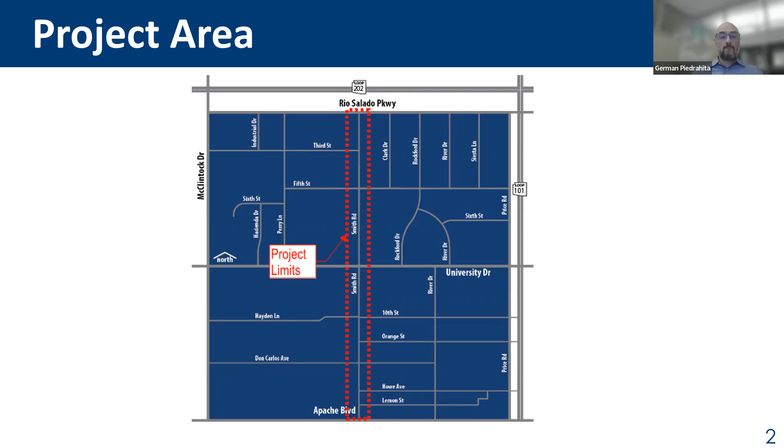Sorry. The purpose of the project is to seek input from businesses and residents and stakeholders to assist in the development of the Smith Road infrastructure improvements. Several public outreach efforts have been conducted as part of the project, and feedback received from those meetings helped identify the priorities for the infrastructure improvements. The goal of this project is to promote safety for pedestrians and bicycles so they can comfortably use Smith Road and be able to access and move freely around the area.

Today's focus will be on finalizing the design concept for Smith Road between University Drive and Rio Salado Parkway. The design concept was based on the Smith Innovation Hub Master Plan that was approved in March of 2022. The secondary focus will be introducing the preferred design for Smith Road between Apache Boulevard and University Drive. The design incorporates input from previous public outreach efforts for this segment of roadway. We would also like to point out the intersections of Smith and University Drive and Smith and Rio Salado Parkway are not included in this project and will be completed under a separate project.

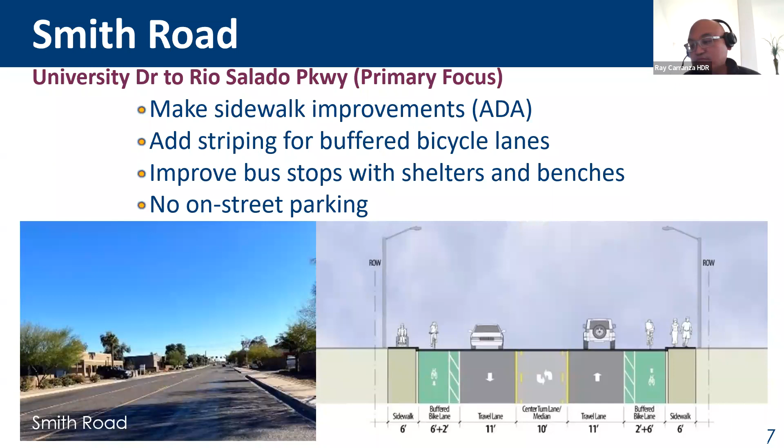This slide shows the proposed improvements between Apache Boulevard and University Drive. As a result of the public outreach efforts, we've received input on concerns about lack of bicycle lanes and the condition of existing sidewalks in the area. Inadequate street lighting was also a concern along the corridor. And for the proposed improvements, the roadway will be striped to include a bike lane from Apache Boulevard to 10th Street and a buffered bike lane from 10th Street to University. The design team is currently evaluating landscape and shade options for the corridor. And these landscape and shade options will occur where there's room within the public right-of-way.

ADA improvements include the sidewalks being widened to 6 feet. Driveways along the segment will also be reconstructed to be ADA compliant. And street lighting will be analyzed and improved as well for this segment. And similar to the segment north of University, the proposed design will not accommodate on-street parking.

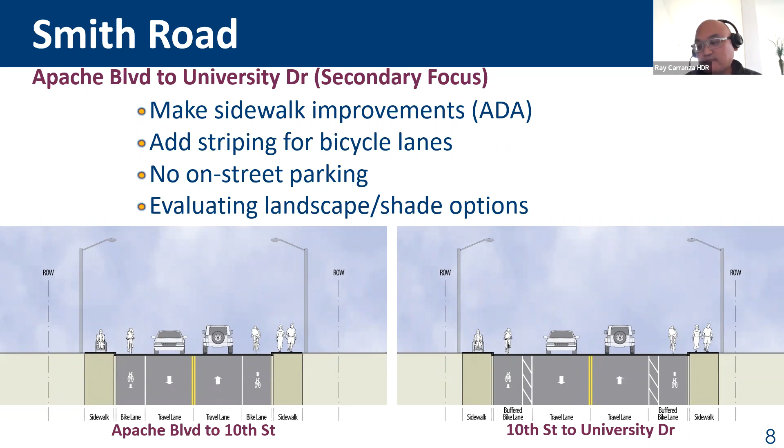And this is just a summary of the proposed infrastructure improvements that I mentioned in the previous slides. The orange segment is from Apache Boulevard to University Drive, and the green segment is from University Drive to Rio Salado Parkway. Both segments include new bike lanes, new bike lane striping, no on-street parking, and additional street lighting for the corridor. Sidewalks will be widened to 6 feet, and the sidewalks will be a combination of attached and detached sidewalks. As I mentioned before, opportunities to include landscaping will be evaluated and incorporated where the site constraints allow for it.

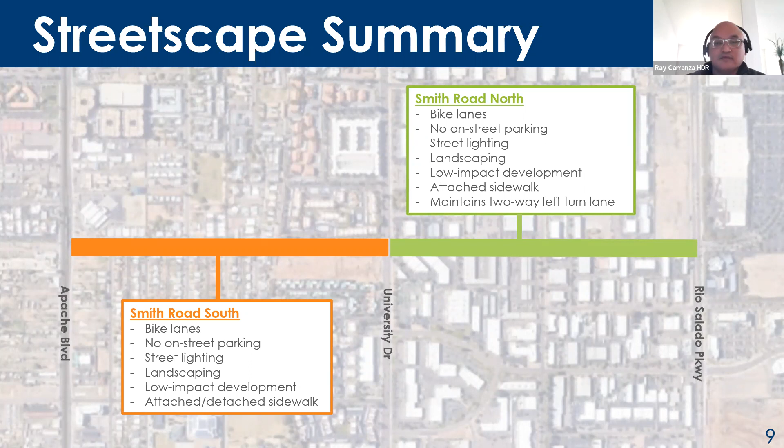Currently, we are in the early stages of design and development, and as we move forward, there are design considerations that will impact the final look of the proposed improvements. Future plan developments in the area were coordinated to make sure that any proposed improvements match what's being proposed by the current developments in the area. The design team has also identified existing features to be removed, relocated, or protected in place, and coordination with stakeholders is ongoing as the design gets refined.

The existing right-of-way available is also a design consideration we're paying close attention to, and also maintaining access along the corridor. And based on previous public and stakeholder input, landscaping was an item we are planning to incorporate into the improvements. Adding landscaping to the roadway cross section will take additional room.

And as we evaluate areas for landscaping, we will need to consider sight distances for safety, and also incorporating existing mature landscaping in the corridor, and also looking at impacts to the right-of-way and temporary construction easement acquisitions. As I mentioned before, we're working with the city to identify transit stops in the area that can be improved with bus shelters.

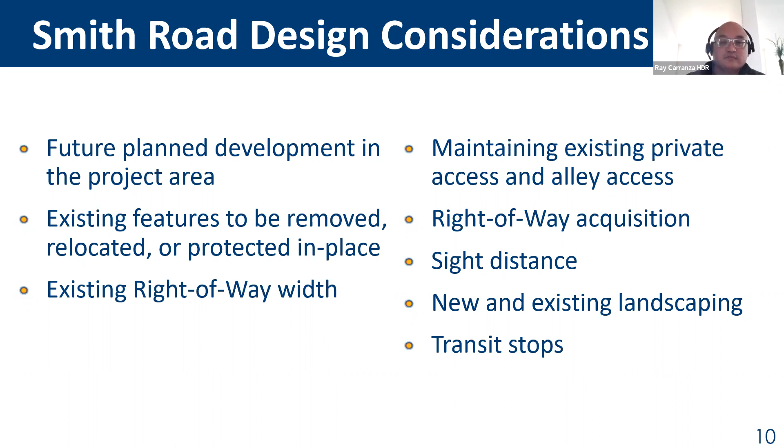The next couple of slides, we'll go over two of the major project considerations as we move into the final design stage. This graphic shows a site visit photo on the upper left and the screenshot from our 50% design plans on the lower right. We have identified potential areas for new right-of-way or easements, mainly occurring at the intersections. The standard ramp configuration has a larger footprint than what you see here in the site photo.

And as the design progresses, we'll look at ways to eliminate or minimize any right-of-way or temporary construction easement needs in the corridor. In the areas where a widened sidewalk may impact existing privacy walls or landscaping, temporary construction easements for new sidewalks and ramps may be required as we move into the final design stage.

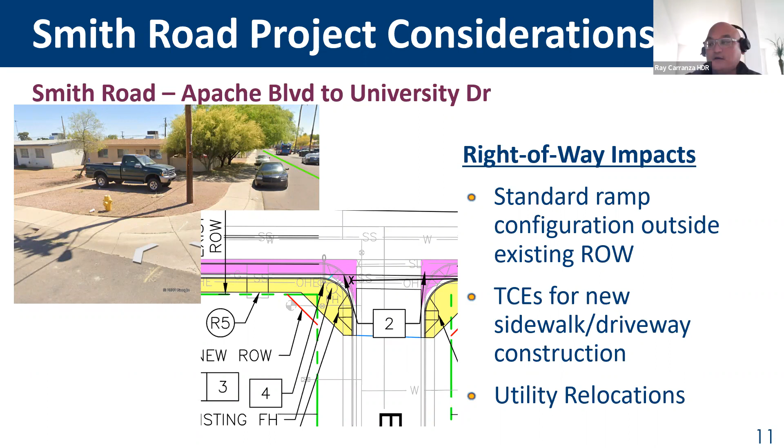Utility relocations will also be evaluated during the design. The existing utilities in the corridor may need to be relocated if they conflict with the proposed infrastructure improvements.

This slide shows the design roll plot. You will be given the opportunity to review the design roll plot online and also in person. This graphic depicts the design elements for the Smith Road infrastructure improvements as shown on the design roll plot. This zoomed in view on the bottom is just a small section of the full corridor between Apache Boulevard and the Rio Salado Parkway. But I just wanted to point out some of the key points on this graphic.

A legend is provided on the roll plot, and the colors identify the major work elements for the corridor. Roadway widening is shown as a magenta colored shape. The yellow color is where sidewalk and ramp reconstruction is being proposed. The existing right-of-way is shown as a green line, and the red line will be either new right-of-way or a temporary construction easement.

Between University and Rio Salado, roadway widening is not anticipated. Sidewalk will be widened to 6 feet as previously mentioned, and the driveways will need to be reconstructed to be ADA compliant. At each of the driveway locations, a temporary construction easement is anticipated due to the reprofiling of the driveway. But as we go further into final design, we'll be looking at those areas to either eliminate or reduce it.

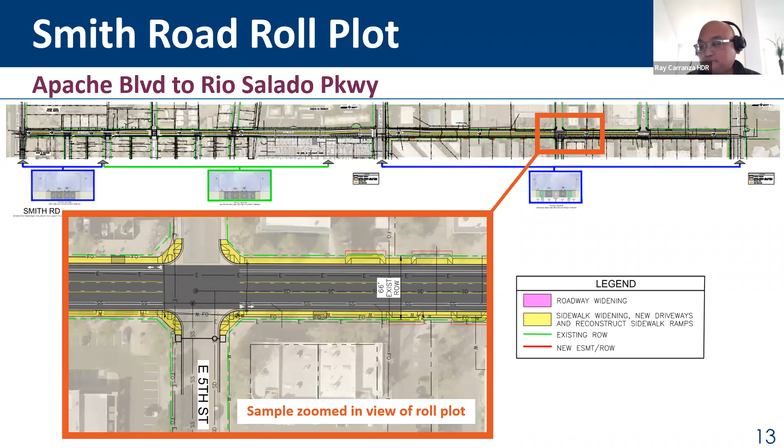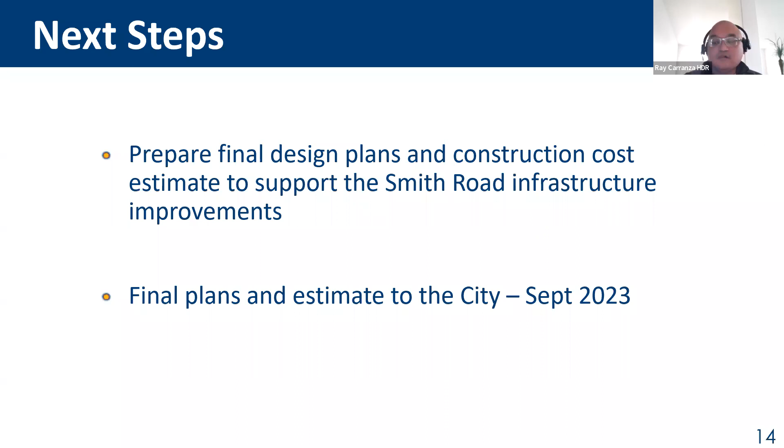Next steps. The next steps for the design team are to prepare final design plans and construction costs for the Smith Road improvements between Apache Boulevard and Rio Salado Parkway. A detailed survey has been received, and this information will be used by the design team to develop the final set of design plans and estimate, which is anticipated to be completed by the fall of 2023.

With that, I'll go ahead and turn it back to German to provide information on how you can get involved in this project. German? Oh, you're on mute, German. Sorry about that. No worries.

A survey is now available at the project webpage, which is tempe.gov/SmithRoad. On the webpage, you can also provide your input, comment on the alternatives, and you can review the 15% design in more detail. Should you want to contact the project staff directly, here are the project contacts.